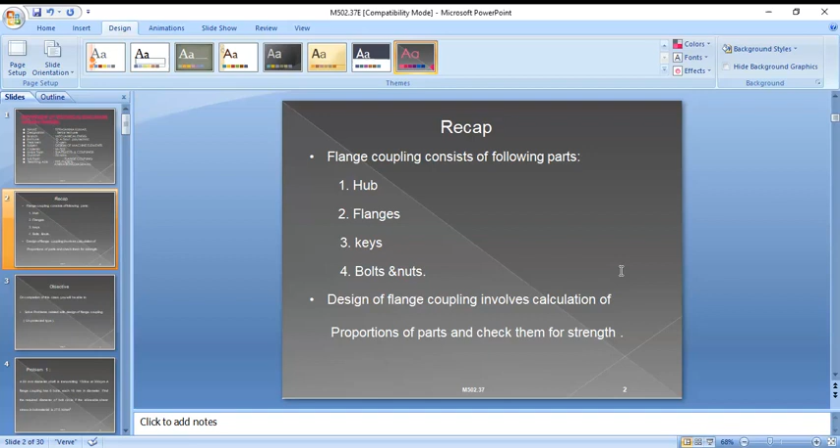In the previous class we discussed the flange coupling. The flange coupling is a rigid coupling which is used to transmit heavy power at low speeds. To transmit more loads at low speeds, we use flange couplings.

The flange coupling consists of two hubs keyed to the shaft, and the hub has projections called flanges, so the hubs extend into flanges. These flanges are brought together and held together by a series of bolts arranged concentrically about the shaft so that their axes are parallel to the shaft axis.

So the flange coupling consists of two hubs which are keyed to the shafts, and these hubs are extended to flanges. These flanges are brought together and held by means of bolts and nuts, so that power is transmitted from one flange to another flange and then flange to shaft.

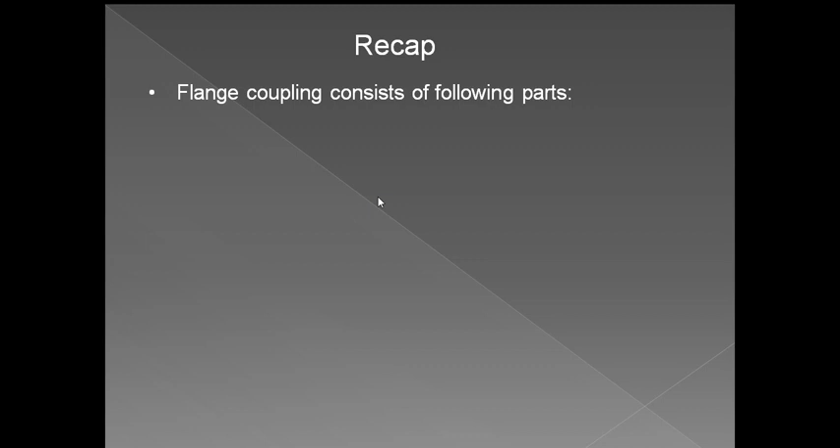The two flanges are joined by means of bolts, and the bolts' axes are always parallel to the axis of the shaft. So it consists of hub, flanges, keys, bolts and nuts.

The bolts transmit the torque from one flange to another flange and then to the shaft. The bolts and nuts transmit power from one flange to another flange. First, from the driving shaft, the power is transmitted to the flanges with the help of keys.

The whole part consists of a rigid unit, so the whole parts act as a single rigid unit so that power is transmitted from driving shaft to driven shaft. So in this we need to design the hub, flanges, keys, bolts and nuts.

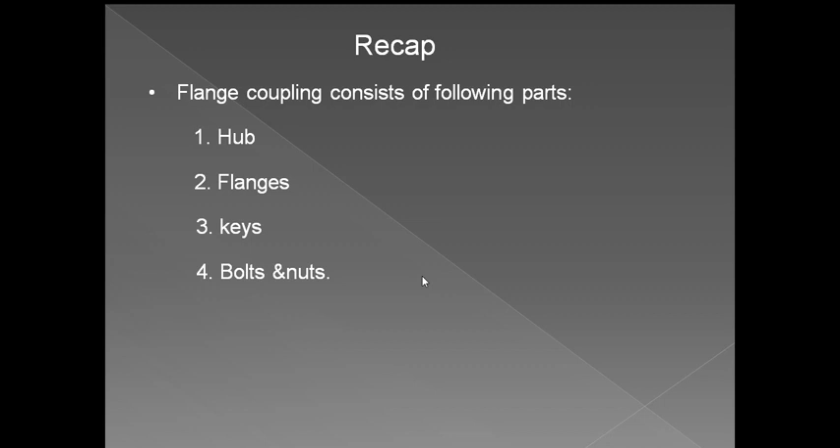The design of flange coupling involves calculations of proportions of parts and checking them for strength. We have certain proportions to find the dimensions of the parts.

These proportions are related to the diameter of the shaft. When you know the diameter of the shaft, you can find the proportions of the hub, flanges, keys, bolts and nuts. After finding the length proportions, we need to check them for strength.

If the strength is below the allowable strength, the permissible strength, then the design is safe. Otherwise, the design is not safe.

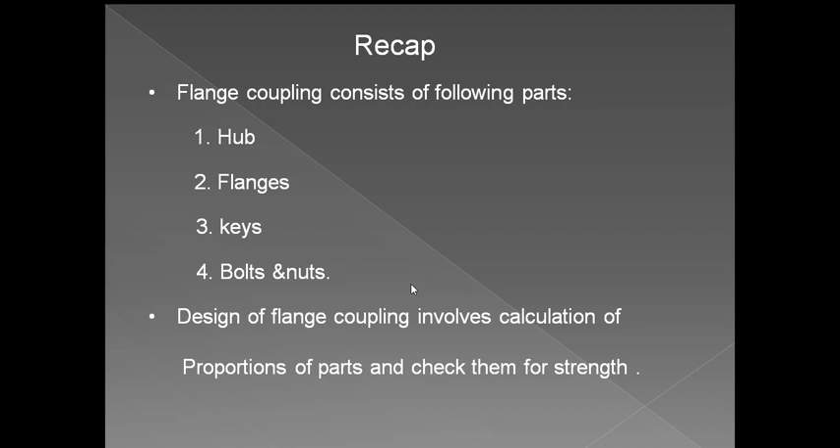On completion of this class, you will be able to solve problems related to the design of flange couplings, that is, the unprotected type. Unprotected means there are no projections on the head of the bolt and nut.

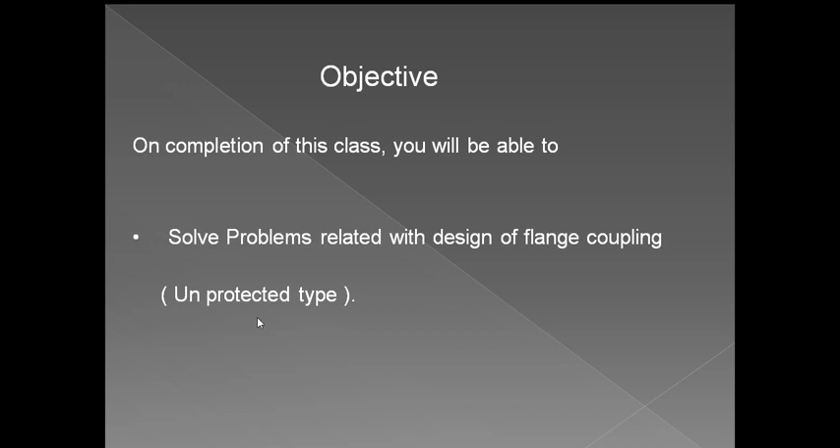So here we are solving problems related to the design of the flange. First problem: a 60 mm diameter shaft is transmitting 150 kilowatts at 300 rpm. A flange coupling has 6 bolts, each 18 mm in diameter. Find the required diameter of the bolt circle if the allowable shear stress in the bolt is 27.5 Newton per mm square.

So here, diameter of the shaft, small d, is 60 mm, and it is transmitting power P equal to 150 kilowatts at speed 300 rpm. The number of bolts is 6, each 18 mm in diameter, so D1 equal to 18 mm.

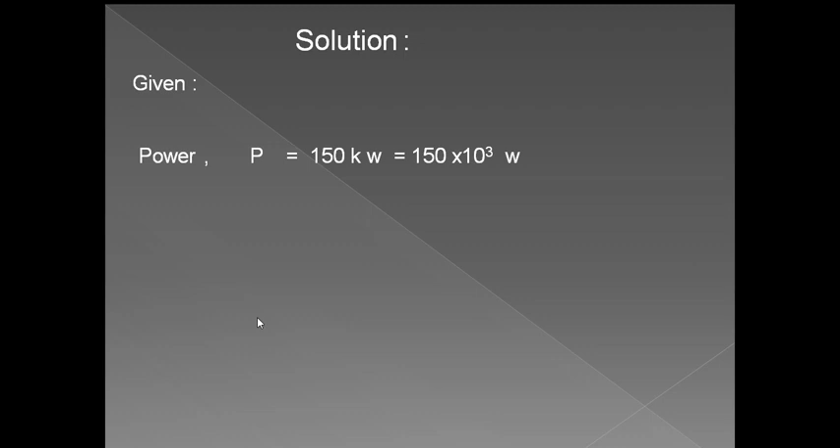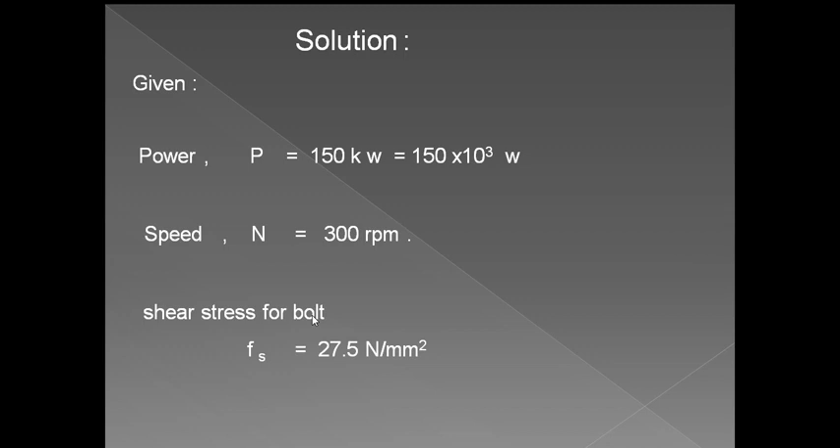Power is given as 150 kilowatt and speed is given as 300 rpm. Shear stress for bolt is 27.5 Newton per mm square. So small d is 60, n equal to 6, d1 equal to 18 mm.

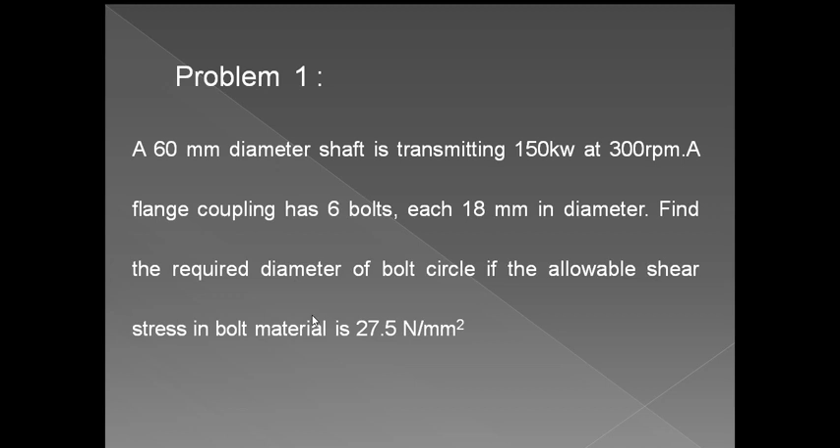Now torque equal to, when you know the power and speed, you will be knowing the torque. So power equal to 2 pi nT by 60. In this way, we can find the torque T equal to 60 into P by 2 pi n.

By substituting the values, 60 into 150 into 10 cube, power equal to 150 into 10 cube. P is 150 kilowatts, so that's why 150 into 10 cube by 2 into pi into speed, which is 300 rpm.

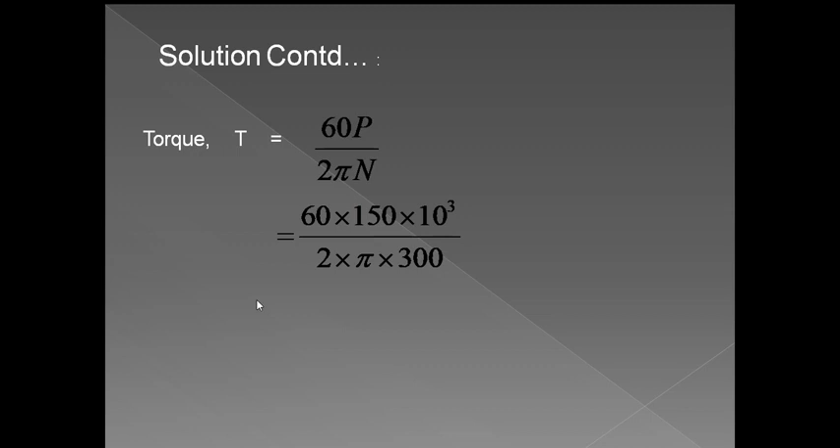From this you can find the torque equal to, so when the power is in watts, torque will be in Newton meter. That is 4774.65 Newton meter. Then it has to be converted into Newton mm, so you multiply by 10 cube to get torque in Newton mm.

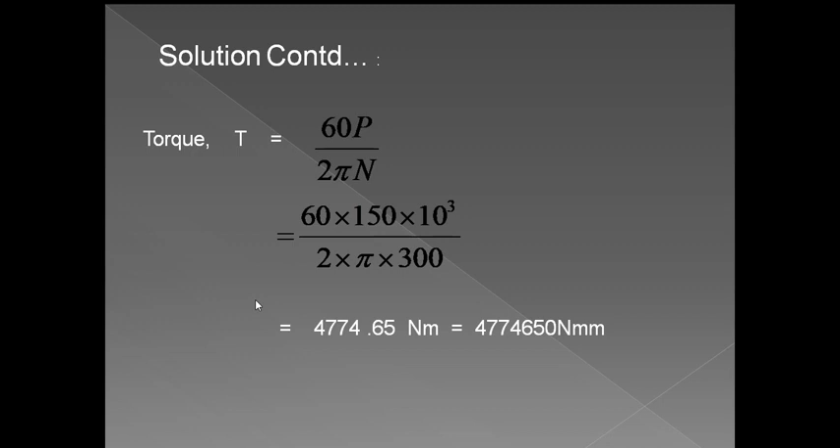By considering the shear strength of bolts, shear strength equal to shear area into shear stress into dP by 2, pitch circle diameter by 2. We know the shear stress. So dP is the bolt circle diameter, that is the pitch circle diameter of the bolts. We know the shear stress value of bolts.

F of S is 27.5. So torque equal to 47,74,650 equal to 27.5 into pi by 4. D1 value is given, that is 18 square.

Here the shear stress is shared by all the n number of bolts, so that's why we need to multiply with n, so that we'll get the total area, the total shear strength we'll get. So that's why we need to multiply with n, that is number of bolts, into dP by 2.

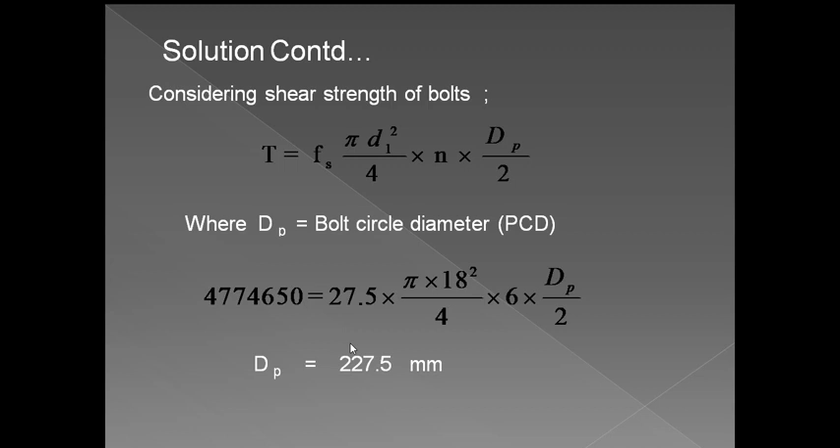So next problem is: design a flange coupling to connect two shafts in order to transmit 7.5 kilowatt at 720 RPM.

The following permissible stresses may be assumed. Permissible shear stress equal to 33 Newton per mm square. Here the shaft, bolt and key material are same. That's why for shaft, bolt and key the permissible shear stress is 33 Newton per mm square.

Here shaft only has shear stress, but bolt and key also have crushing stress. So for bolt and key, permissible shear crushing stress equal to 60 Newton per mm square.

Here permissible shear stress for flange is 15 Newton per mm square, since flange is made up of cast iron. Permissible shear stress for cast iron is 15 Newton per mm square. So these are the given values.

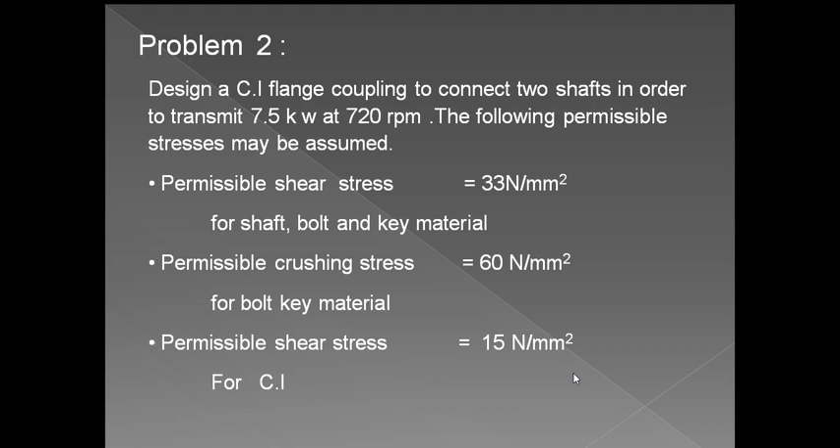So power is 7.5 kilowatt, that is 7.5 into 10 cube watt. Speed is given, that is 720 RPM. Shear stress for bolt, key, shaft is 33 Newton per mm square. Crushing stress for bolt and key is 60 Newton per mm square. Permissible shear stress for cast iron, that is flange, is 15 Newton per mm square.

So first we need to find the diameter of the shaft. Afterwards, to get all the dimensions of the flange coupling, we need to substitute the d value in the proportions for the remaining parts.

So first we need to find the torque equal to 60 into P by 2 pi n. Here 60 into P is 7.5 into 10 cube, by 2 into pi into 720, which is the RPM. From this we got the torque equal to...

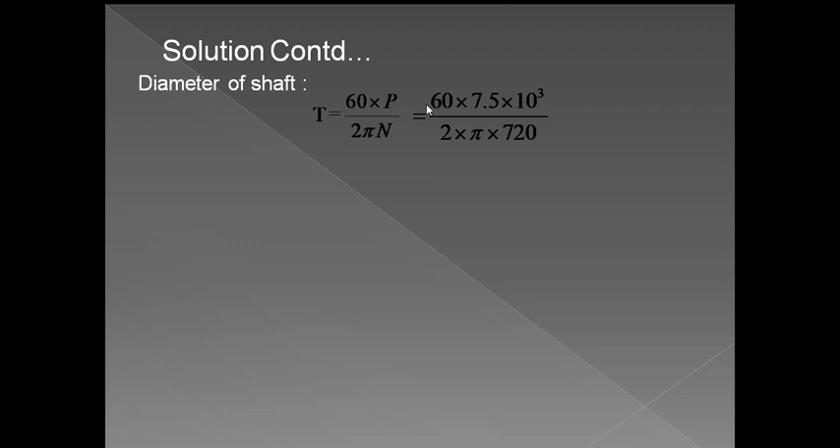99.522 Newton meter, because the power is in watts, we get the torque in Newton meter. So we need to convert the Newton meter into Newton mm, by multiplying with 10 cube. So 99,522 Newton mm is the torque induced.

So now to find the diameter of the shaft, torque equals shear stress into pi d cube by 16. The shear stress of the shaft is given in the problem, that is 33 Newton per mm square. So D equals cube root of 16 into T by pi into Fs.

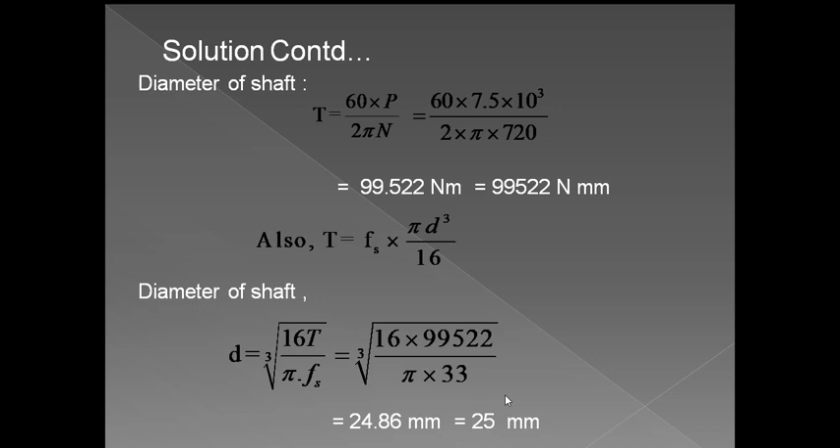So here diameter of the shaft is 25 mm, D equals 25 mm. Now we need to design the flange coupling, first we need to design the hub. Hub is nothing but a hollow shaft. So for the hollow shaft, inside diameter of the hub is equal to the shaft diameter, that is D equals 25 mm.

So outer diameter of the hub, capital D equals 2D, that is 2 into 25, that is equal to 50 mm.

So length of the hub in each shaft equals L equals 1.5D. So that is 1.5 into D equals 25, then it is 37.5 mm.

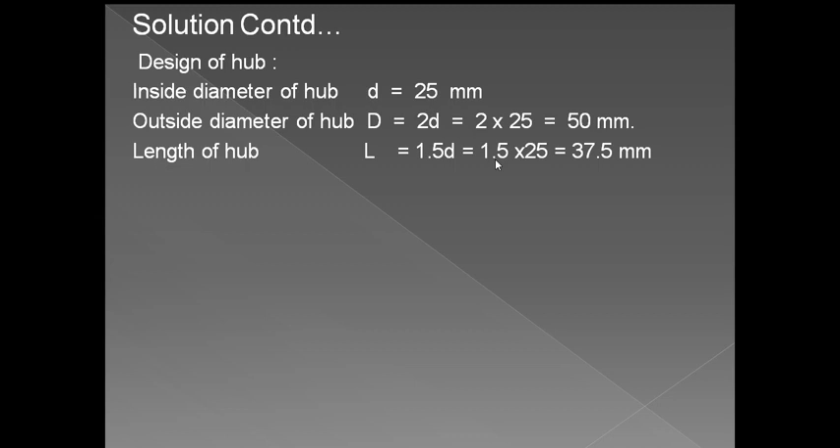Now we need to check for the induced shear stress in the hub. Here we considered hub as a hollow shaft, hollow cylinder. So torque equals shear stress of hub into pi into capital outer diameter power 4 minus inner diameter power 4 by 16 into outer diameter. So here we need to check for the shear stress induced in the hub, Fs1 we need to find.

Torque is already found out. So now Fs1 equals 16 into capital D into torque by pi into capital D power 4 minus small d power 4. We know the outer diameter and inner diameter, and torque is already found out, torque equals 99,522. So 16 into outer diameter of the hub is 50 into 99,522 by pi into 50 power 4 minus 25 power 4. Then shear stress induced is equal to 4.327 Newton per mm square.

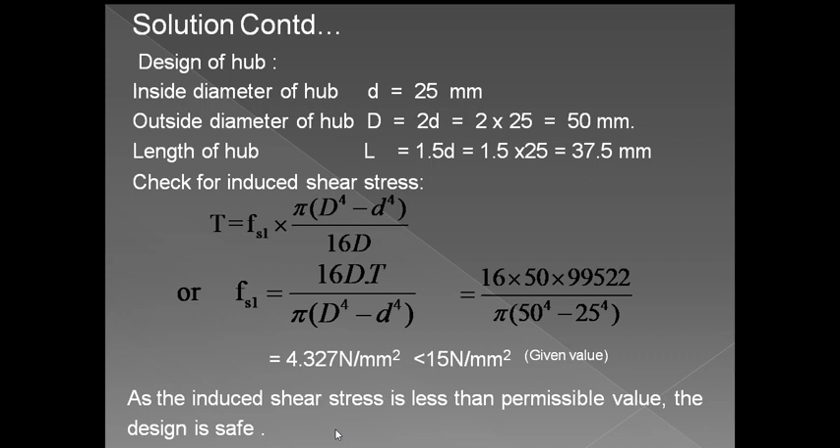So next we need to design the flanges. In design of flange, we need to find the thickness of the flange and outside diameter of the flange. So thickness of the flange TF equals 0.5D, that is 0.5 into 25, then it is 12.5 mm.

The outer diameter of the flange is equal to DO equals 4D, 4 into 25, that is 100 mm. Thickness of the flange is 0.5D, 0.5 into 25, that is 12.5 mm. And outside diameter of the flange is DO equals 4D, that is 4 into 25, that is 100 mm.

So here we need to check the shear stress induced in the flanges. Flanges try to shear off at the surface junction at the surface of the hub. So when the flanges and hub connect, at that place the flanges try to shear off. So then shear strength equals shear area into shear stress into outer diameter of the hub by 2. Here the shear area is circumference of the hub into thickness of the flange, so that is pi d into TF is the area that is under shear.

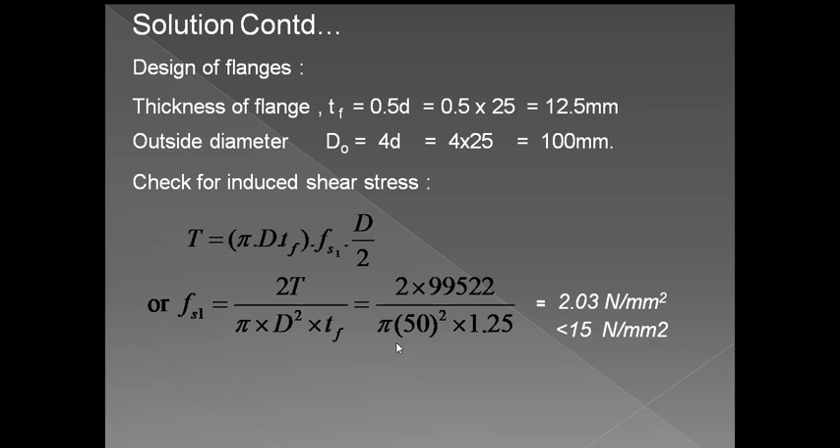This is lesser than the permissible value of shear stress for the cast iron, for the flange. So the induced stresses are lesser than the permissible value, then the design is safe. So here hub and flanges are under shear stress only.

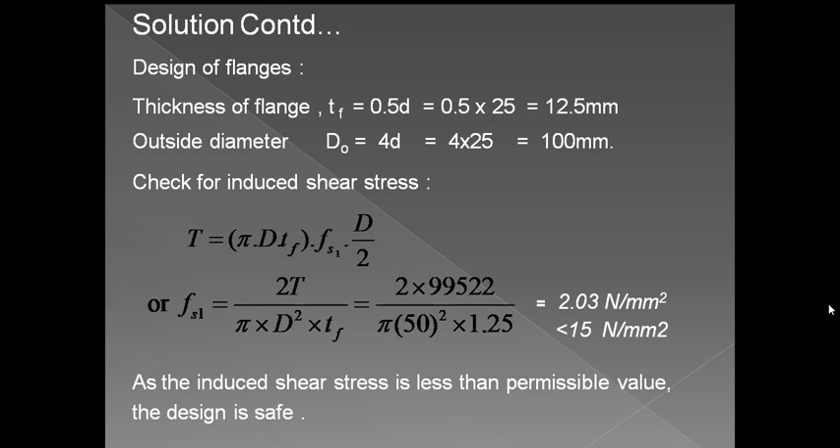Next is design of key. W equal to D by 4. We take it as a rectangular key. So W equal to D by 4, that is 25 by 4, that is 6.25 mm. Then we take it as 7 mm as width. And thickness is also, we take it here square key.

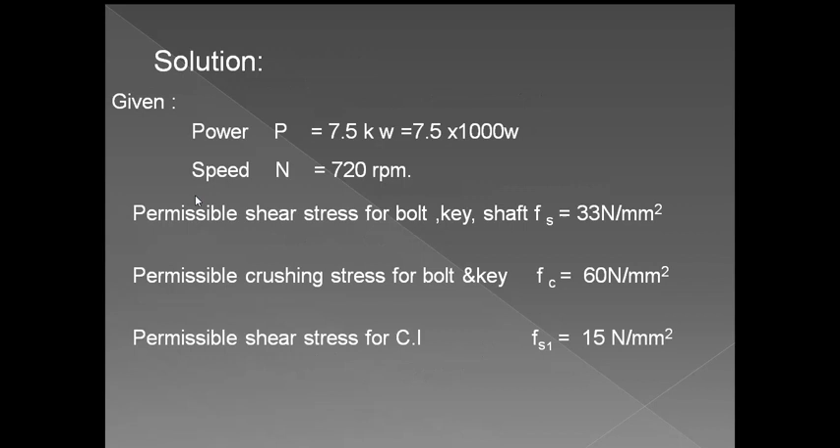So that is also, sorry, here we take rectangular key, that is D by 6, that is 25 by 6, that is 4.16, equal to 5 mm.

Length of the hub equal to 1.5 D. So that is 1.5 into 25, that is 37.5 mm length. Length of the hub equal to length of the key. So 1.5 into D, that is 37.5 mm is the length of the key. So we know the width, that is 7 mm, thickness is 5 mm, and length is 37.5 mm.

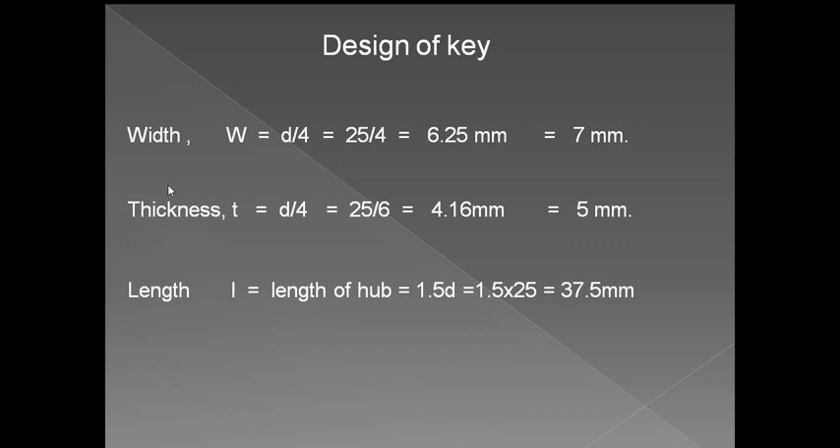So we need to check the shear strength of the key. Shear strength of the key can be found out by, we need to find T equal to WL into Fs into D by 2. Shear area into shear stress into radius of the shaft.

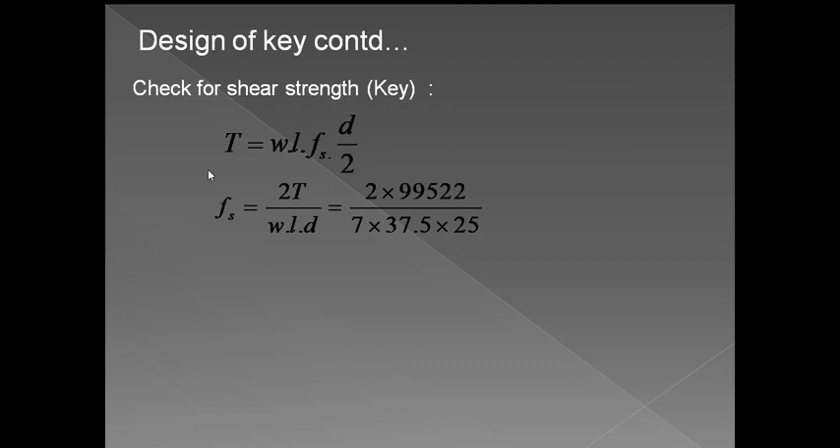So Fs equal to 2T by WLD, 2 into 99,522 by 7 into 37.5 into 25. So Fs equal to 30.33 Newton per mm square.

That is lesser than the induced permissible value. So here the key is safe in shear because induced shear stress is lesser than the permissible value. So the design of key is safe in shear.

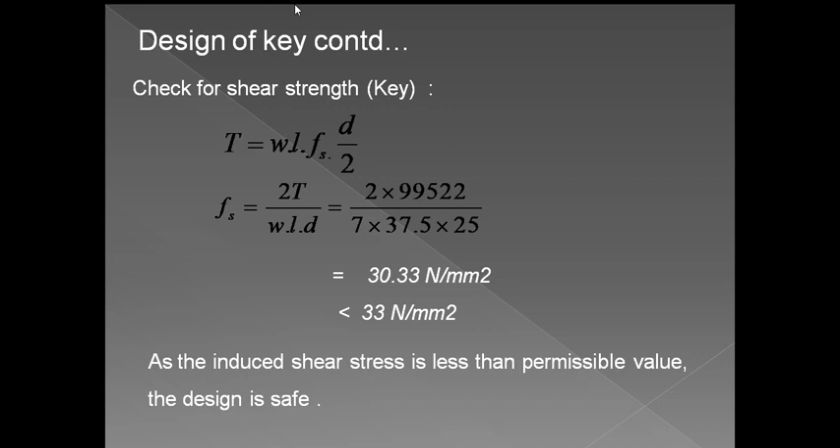The next one is check for the crushing stress. Crushing strength of the key is crushing area into crushing stress into D by 2.

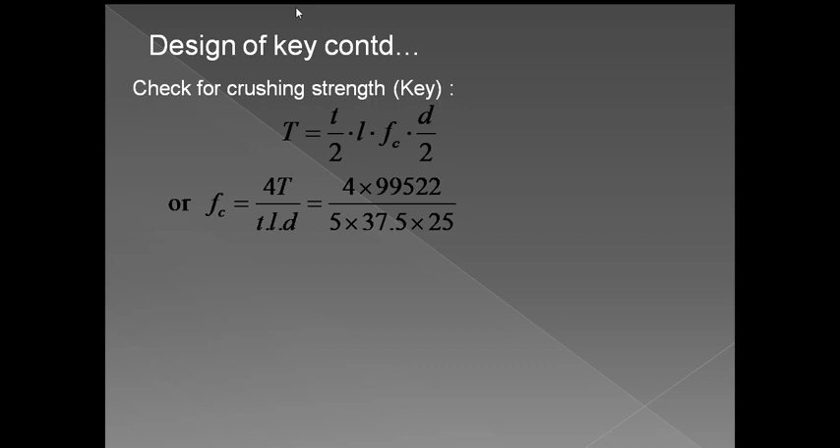So then crushing stress Fc equal to 4T by TLD, 4 into torque by crushing area into dia of the shaft. That is 4 into 99,522 by 5 into thickness is 5 into length is 37.5 into dia of the shaft is 25. So then it is 84.9 Newton per mm square.

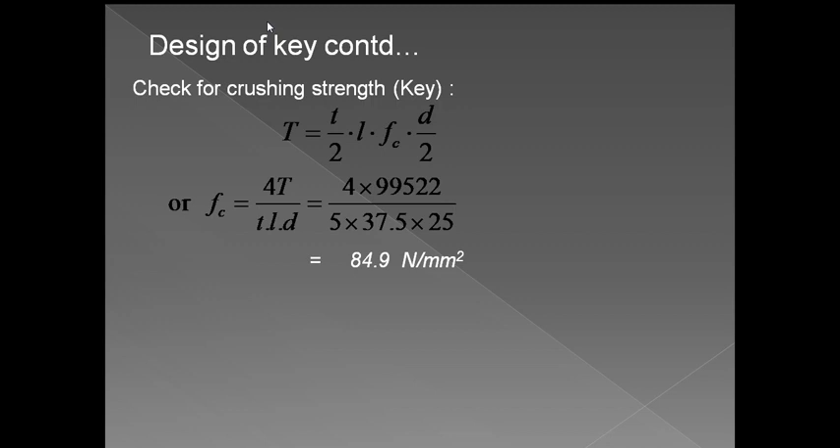So induced crushing stress is greater than the permissible value, hence the key will fail in crushing. The induced one is 84.9 Newton per mm square, whereas the permissible value is 60 only. So induced value is greater than the permissible value, hence the key will fail in crushing.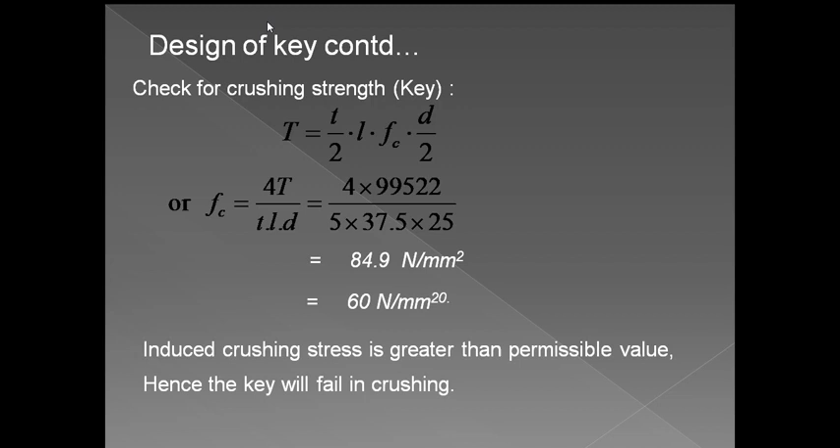Therefore adopt the key for the following dimensions. We need to increase the width, thickness and length values. So here we take width as 8 mm, thickness as 6 mm, and length equal to 48 mm.

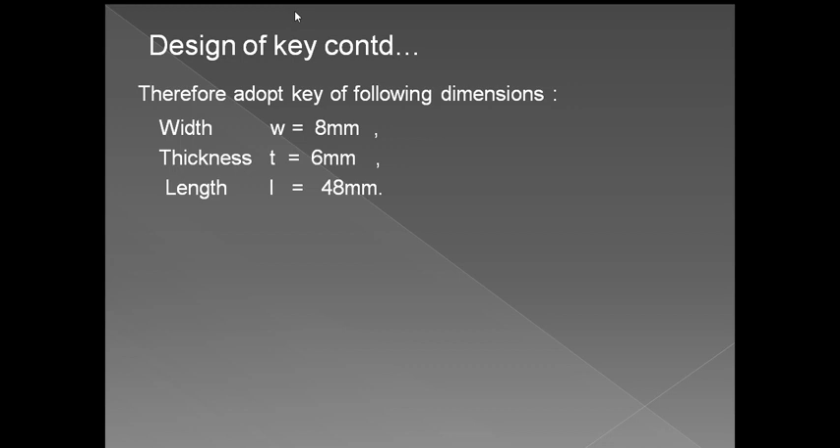Now we need to check for the shear strength, crushing strength. Substituting the new values, Fc equal to 4 into 99,522 by, thickness we have taken as 6 into length is 48 into 25, the dia of the shaft. By substituting these values, the crushing stress induced is 55.29 Newton per mm square.

The induced stress is below the permissible value. Then the design is safe. So therefore these are the correct dimensions of the key. When you use these dimensions, the key will be safe in both shearing and crushing.

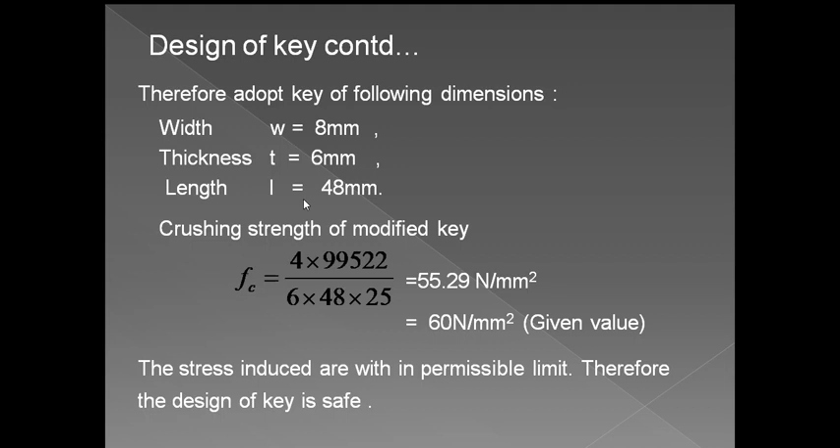So next, design of bolts. Here the shaft diameter is 25 mm. For shaft diameter up to 40 mm, the number of bolts required is 3. Based on the diameter of the shaft, we can find the number of bolts. So here number of bolts is 3 for shaft diameter of 25 mm.

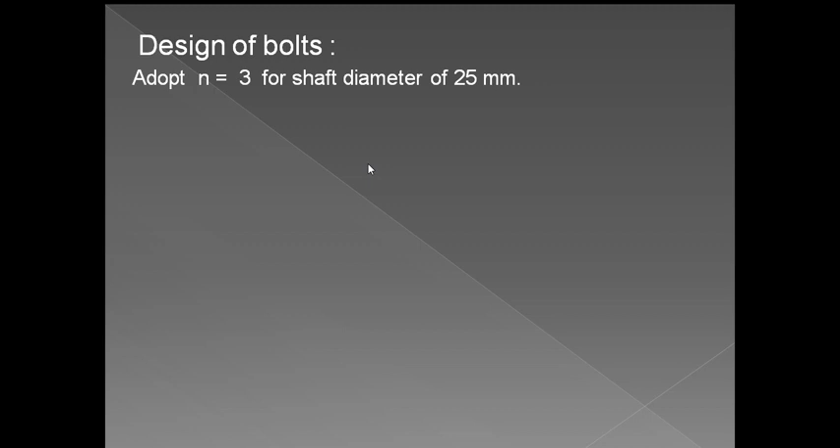Then bolt circle diameter, which is the pitch circle diameter, is 3D, that is 3 into 25, that is 75 mm.

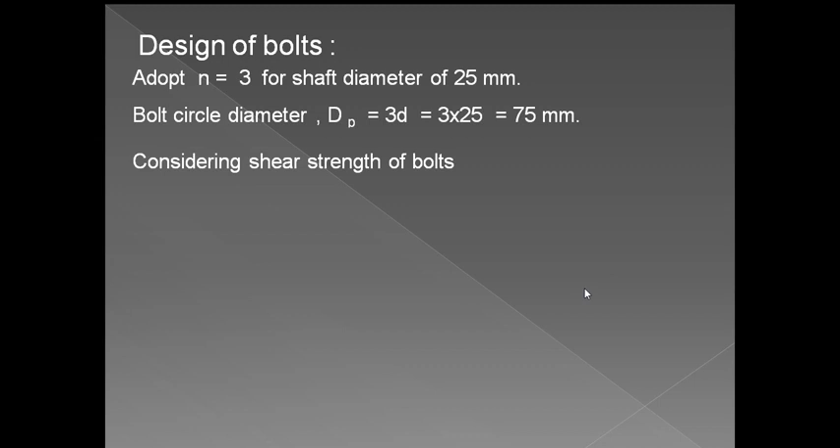Now considering the shear strength of the bolts, torque equals shear area into shear stress into dP. Here we don't know the diameter of the bolt, but we know the dP value, number of bolts, and torque induced. So we need to find the diameter of the bolts.

D1 equals square root of 8 into torque by pi into number of bolts into shear stress into pitch circle diameter. By substituting the values, we get under root of 8 into 99,522 by pi into 3 (number of bolts), with permissible shear stress value 33 into 75. We get D1 as 5.84, that is 6 mm. So D1 equals 6 mm now.

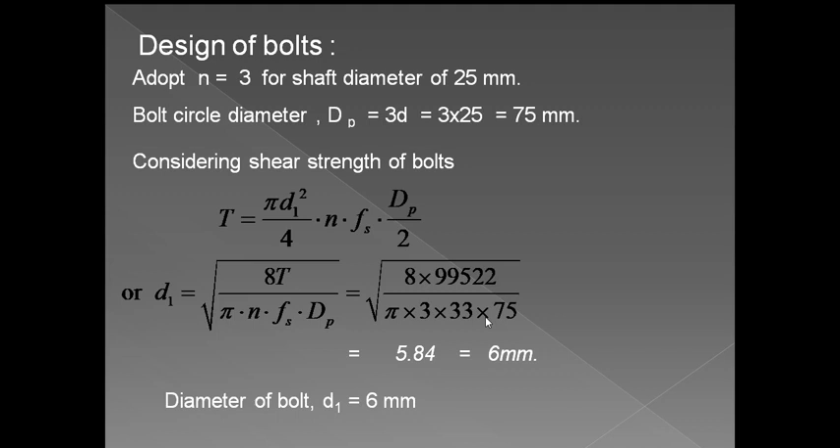Now considering the crushing strength, torque equals crushing area of bolt into crushing stress into dP by 2. Here we know the D1 value, Tf, and number of bolts.

Crushing stress, we need to check for the crushing stress. So crushing stress equals 2 into torque by d1 into tf into n into pitch circle diameter. Now it is equal to 2 into 99,522 by d1 equals 6 into 12.5 into 3 into 75, so that is 11.79 Newton per mm square.

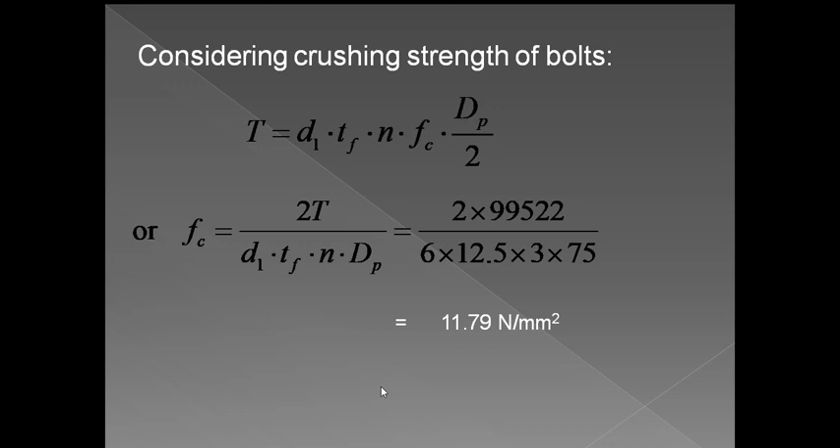So here the crushing stress induced is lesser than the permissible value. Hence the bolts are safe against shearing and crushing.

So in this way we need to find the hub, flange, bolts and nuts values by keys using the proportions. Then we need to check for the induced stresses. If the induced stresses are below the permissible values, then the design is safe.

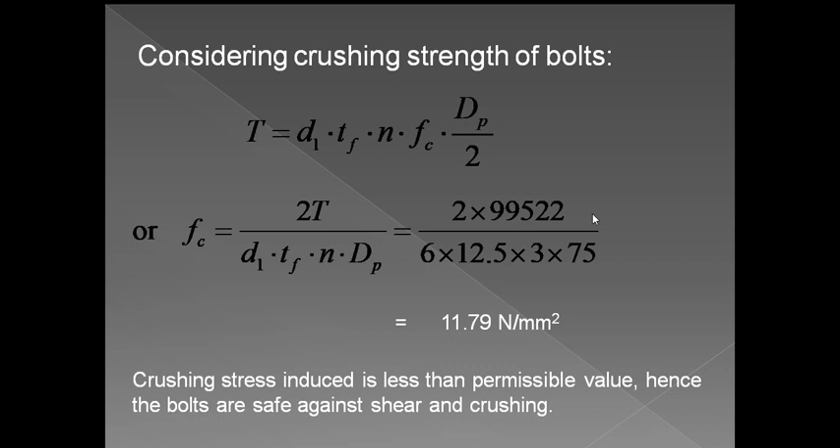So this is the unprotected type flange coupling. We find out each value and we find out the stresses induced.

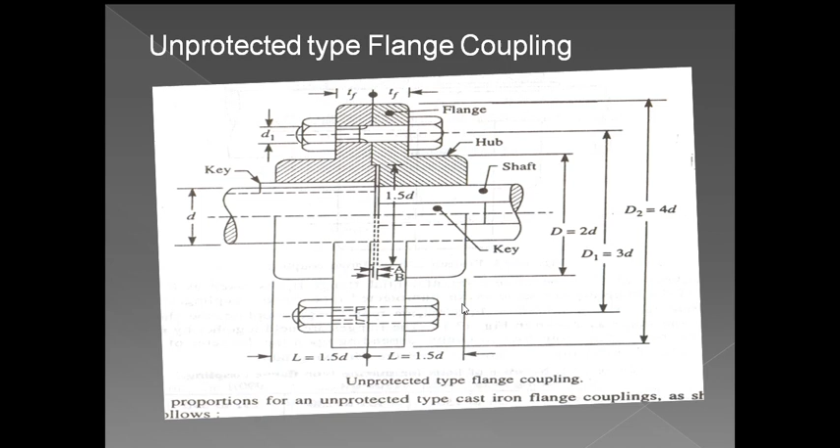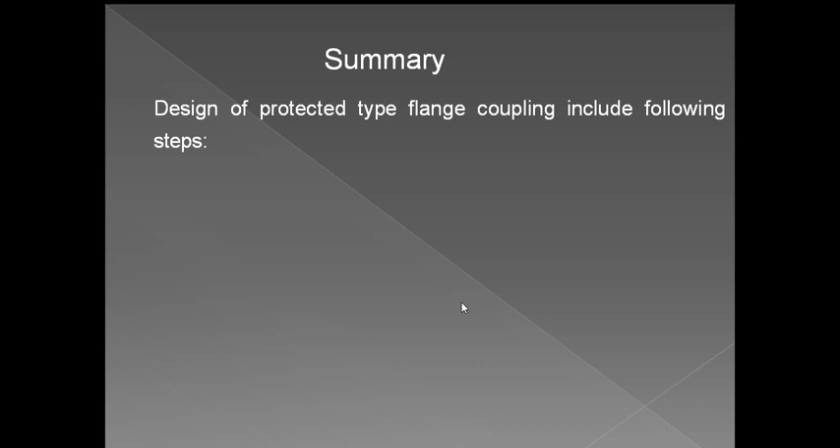So in this we designed the protected and unprotected type flange coupling. Here first we need to find the torque by using power equals 2 pi N T by 60. Then you need to find the diameter using torque equals fs into pi d cube by 16.

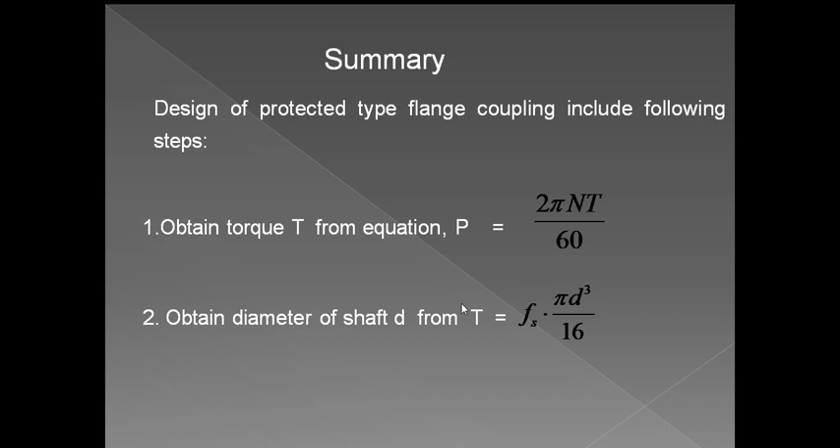So then you need to find the hub proportions. Hub diameter equals d, outer diameter equals 2 into d, length is 1.5d.

Next we need to check for the induced shear stress using the equation T equals fs1 into pi into (capital D power 4 minus small d power 4) by 16 into capital D. Here our hub is like a hollow shaft. Then torque equals fs1 into pi into (capital D power 4 minus small d power 4).

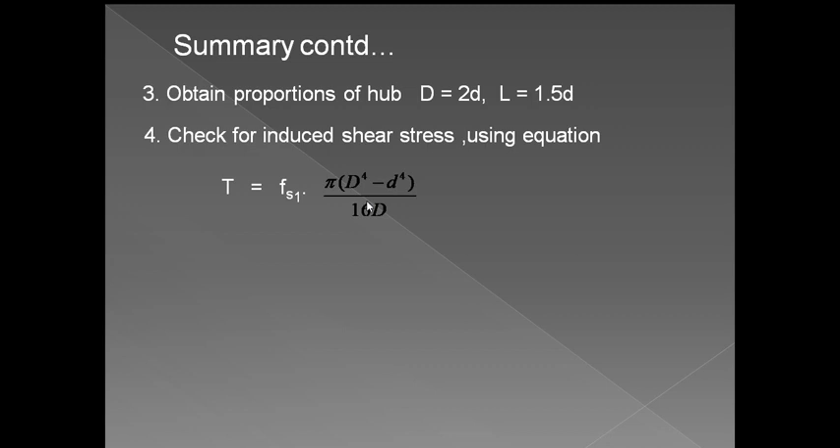So here you need to check for the shear stress developed and induced. If the induced stress is below the permissible value, then the design is safe.

So to find the flanges, we need to use the proportions. Thickness of the flange equals 0.5d and outer diameter of the flange equals 4 into d.

So here we need to check for the induced shear stress, that is T equals shear area of flange into shear stress into capital D by 2.

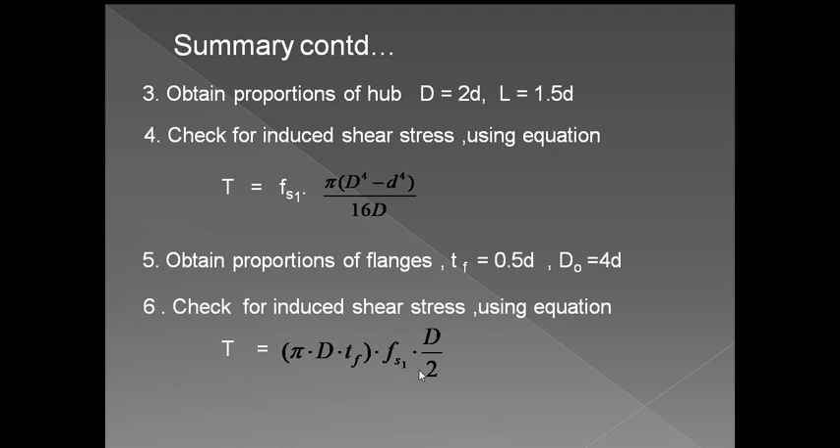Next, key proportions for rectangular key: width equals d by 4, thickness equals d by 6, and length is 1.5d.

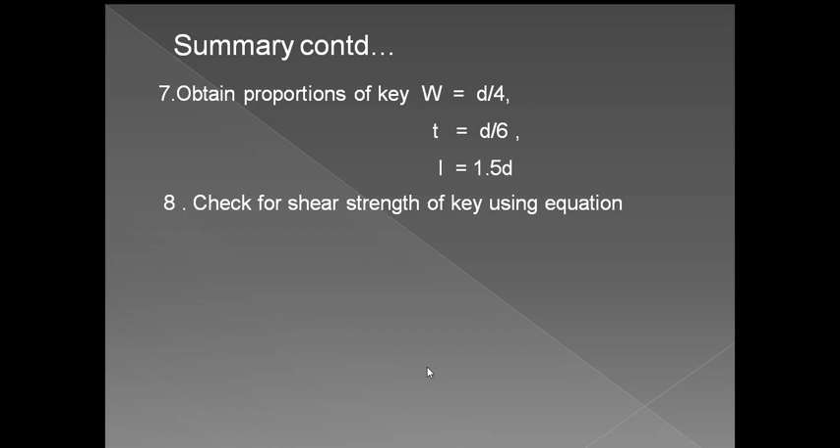And we need to check for the shear strength of the key using torque equals shear area into shear stress into d by 2, and crushing area into crushing stress into d by 2.

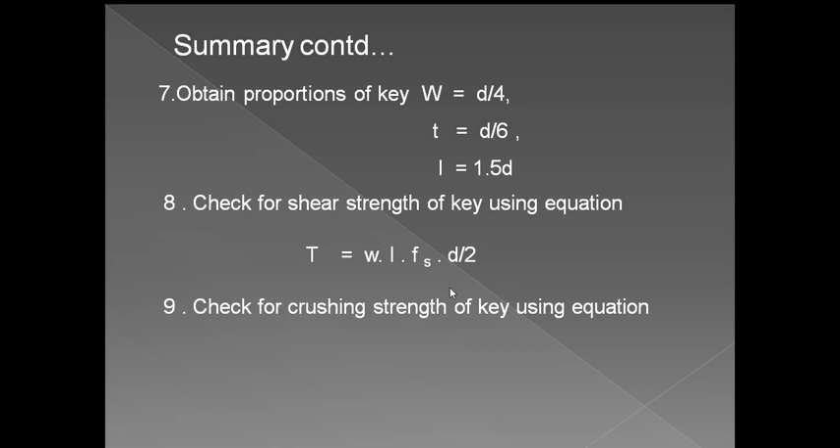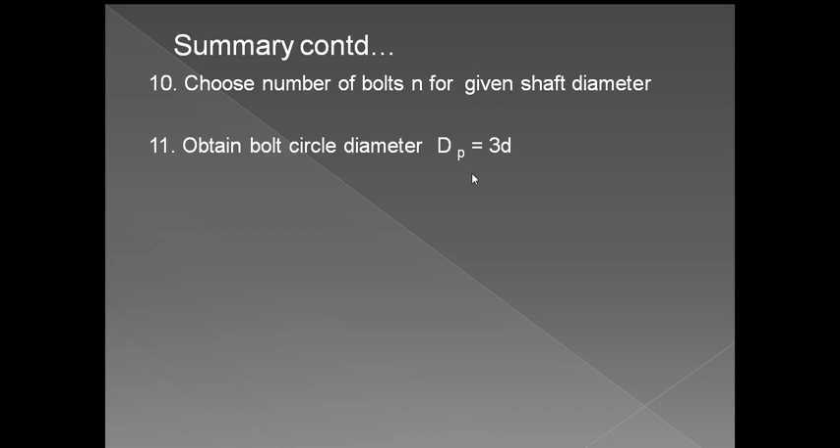So the number of bolts can be chosen using the shaft diameter. To obtain bolt circle diameter dP equals 3d, we need to check for the shear strength, that is torque equals shear area into shear stress into dP by 2.

So pi into d1 square by 4 into number of bolts into shear stress into dP by 2. We need to check for the crushing strength using torque equals d1 into Tf into N into Fc into dP by 2. So in this way we need to check for the shearing and crushing strengths using these equations.